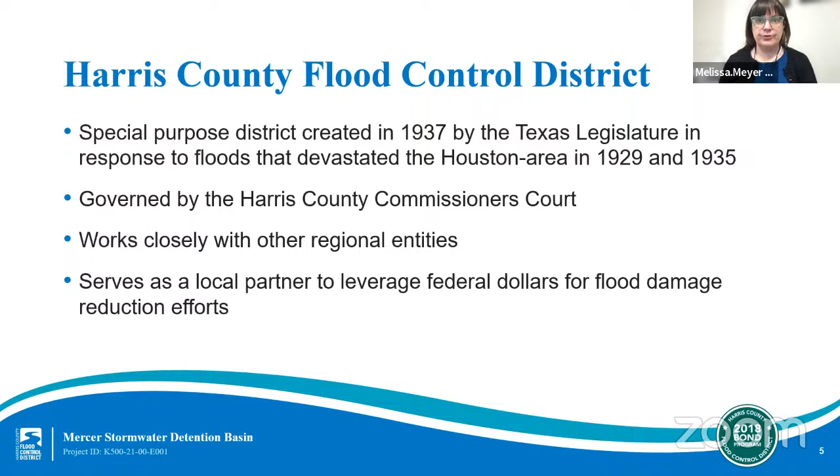The Flood Control District's mission is to provide flood damage reduction projects that work with appropriate regard for community and natural values. Understanding that our systems may mean different things to many people makes it challenging to construct effective projects that also provide the multifunctional use communities seek, as well as construct them with regard to natural values in our highly urbanized and continuously growing region.

Harris County includes 23 main watersheds comprising approximately 1,800 square miles of land and more than 2,500 linear miles of channels, including man-made channels and natural streams, creeks, and bayous. To imagine the totality of this infrastructure, note that 2,500 miles is approximately the distance from New York to California.

The 23 watersheds are all distinct geographical regions of land that serve as a catchment area that drains to a common main channel or drainage outlet. Each watershed has its own unique characteristics and needs based on its level of maturity and geographical location. The program and projects we are presenting on tonight are in the Cypress Creek watershed located in Northwest Harris County.

Now, Harris County and its surrounding area is flood prone for a number of reasons. Namely, it's because we experience extreme rainfall events along the Texas coast, including tropical storms and hurricanes. Our area has a largely flat topography or elevation with slow draining land. And lastly, we have large concentrations of soil types such as clay that do not soak up excess rainfall quickly.

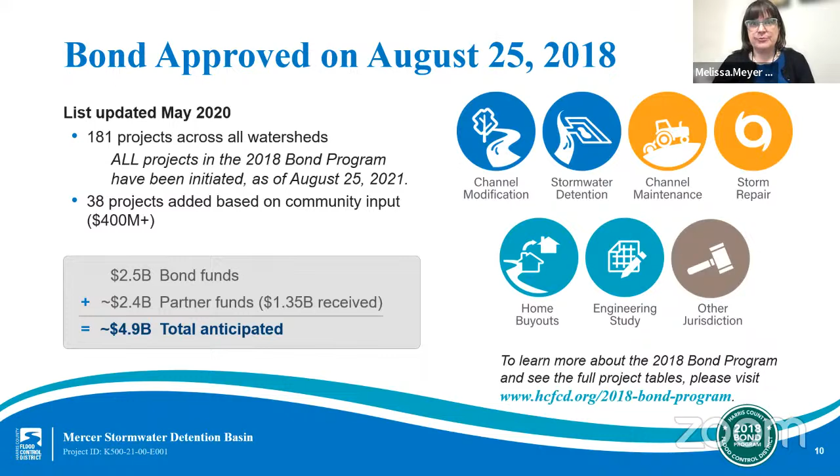The actual schedule of each individual bond project will depend on a variety of factors, including the overall project planning, design, and construction life cycles. Some tasks included in these life cycles, such as environmental permitting, right-of-way acquisition and utility relocation, or in some cases, partner funding requirements of a particular grant, may extend the time it takes to complete the overall schedule of the project. Project lists and estimated schedules are updated regularly on our website.

As bond projects move forward, we're making significant progress towards resilience in Harris County. We shared an update with the Harris County Commissioners Court in January of this year and highlighted a few notable stats. We've completed or closed 27 projects. We've secured $1.43 billion in partnership funding to stretch the bond funds even further for our community. And we've hosted more than 180 community engagement meetings. Your input is critical to our efforts, and we want to ensure our conversations continue. We'll continue these biannual updates moving forward to share progress on the program.

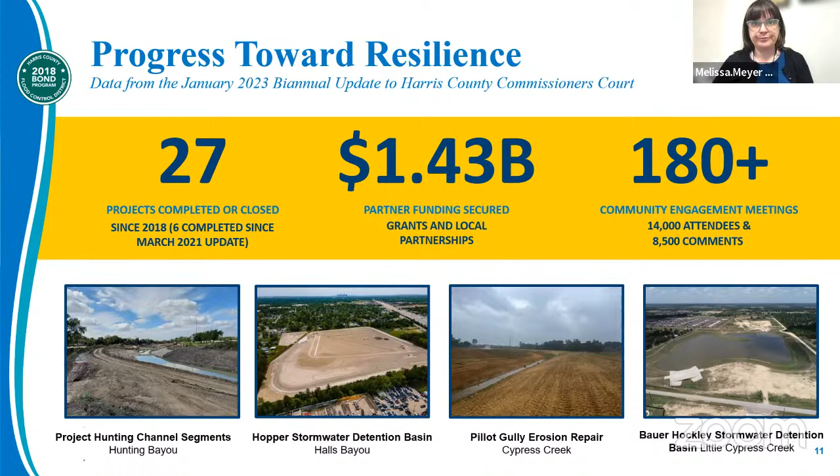While the voter bond was for $2.5 billion, the full cost of every project in our bond list is almost $5 billion. So we made it clear from the outset that we would need funding partners to obtain the full potential of the constructed projects in the bond program. And as I've mentioned, we've had some success so far by securing more than $1.43 billion in partnership funds for projects across Harris County.

And this graphic illustrates that there are many partnership opportunity sources, including federal, state, and local funding that the Flood Control District is working to secure for Harris County. Each agency has its own definition of an eligible project, as well as its own requirements for local match funding. So the Flood Control District works diligently to match each project to the appropriate partnership opportunity.

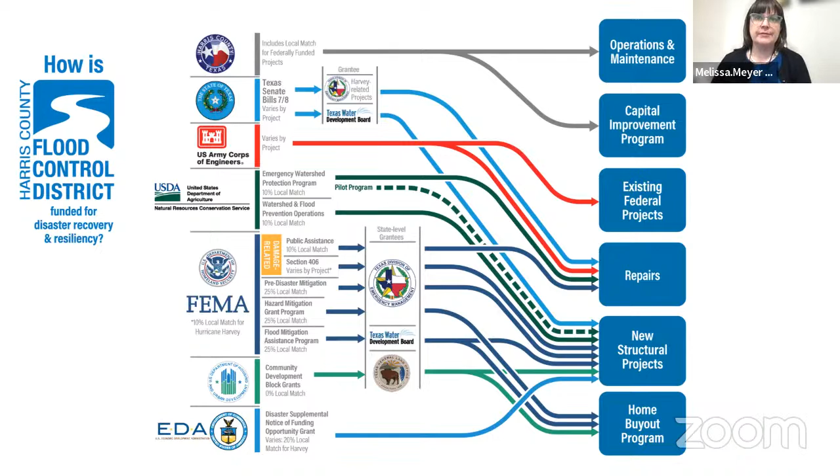We'll now discuss the portion of the program that is specifically about the Mercer Stormwater Detention Basin project. As a reminder, we are looking for your participation as we discuss this portion of the program in more detail. So please feel free to drop any questions or comments you have into the comment box, or to comment via phone by pushing the star key.

The project area is in the downstream portion of Cypress Creek, east of the Hardy Toll Road and north of FM 1960. The Mercer Stormwater Detention Basin is expected to hold 512 acre-feet of stormwater once completed. This project will also be constructed to avoid some jurisdictional wetlands at the site. Disturbing the wetlands that are currently on the property would require extensive environmental permitting.

As we discussed at last year's meeting, this project was awarded a $15.4 million grant from the U.S. Department of Housing and Urban Development's Community Development Block Grant Disaster Recovery 2018 Fund. This CDBG-DR grant has stipulations for when the project must be completed. So this project has been on an expedited timeline, with the preliminary engineering report being transmitted to Harris County Commissioners Court late last summer. And we expect construction to begin later this year. We'll discuss some of the project background before moving into the construction timeline and impacts.

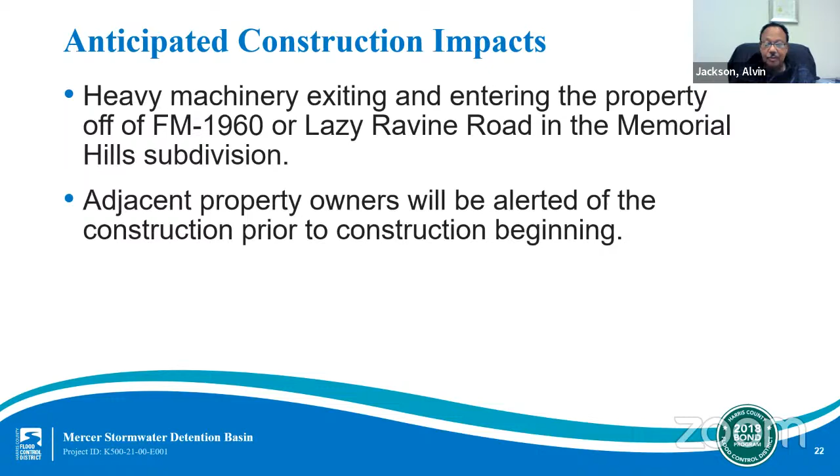Any concerns in the time of construction should be reported to the Flood Control District Service Request Center on our website at www.hcfcd.org. Thank you, Alvin. Okay, Melissa, this next one is for you.

Can you help to explain this concept to those listening tonight? Many residents obviously would want to see stormwater move out of their neighborhood more quickly. Why can't local governments just widen neighborhood ditches and roadside ditches to solve the flooding problem? Sure, that's a good question. The Flood Control District is a no adverse impact organization, and this means that the Flood Control District does not create projects that will negatively impact any of the community downstream.

Thank you, Melissa. Let's stay with you for this next question. What about wildlife in this area and environmental impacts in construction of these basins? The Flood Control District follows federal law on the protection of sensitive environmental areas such as wetlands, and we check for threatened and endangered species, and we avoid clearing during migratory bird nesting season.

Thank you, Melissa. Alvin, flood risk reduction is the goal of our agency, but this is an important topic for residents, including Evelyn, who has joined us tonight. Will there be any recreational amenities planned around this project? The Flood Control District does not typically build trails and other recreational amenities, but we frequently work with partner organizations who want to finance and maintain any recreational elements the community desires. At this time, we do not have any definitive plans to work with a community partner on developing recreation amenities for this site. Thank you, Alvin.

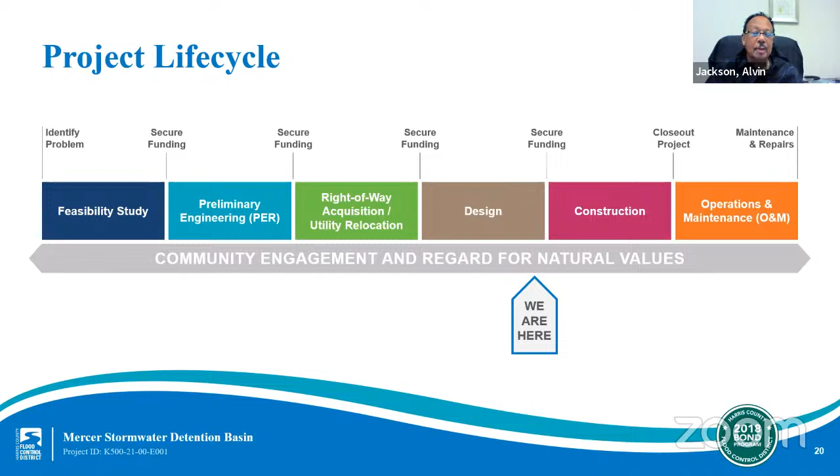Thank you, Alvin. Melissa, the Flood Control District has funding and is actively securing funding to ultimately build flood damage reduction projects. But what happens after these projects are in the ground? Is the Flood Control District responsible for maintenance and upkeep of stormwater detention basins after they are complete? Generally speaking, yes. But to clarify, the Flood Control District is responsible for maintenance such as mowing, debris removal, and vegetation management of its properties. We mow the majority of our channels and basins only 3 times a year.

However, there are instances where a local entity, such as a MUD or an HOA, chooses to enter into an agreement with us, where the Flood Control District pays them for the 3 mowing cycles, and the entity takes on the cost for additional mowing cycles at their discretion. If and when a sponsor chooses to build and maintain a recreational amenity on Flood Control District property, mowing is often a part of that conversation, and similar agreements as noted above can be utilized.

Also, I want to mention that we have a very helpful interactive mowing tool on our website at hcfcd.org that's updated to reflect our current mowing activities. Thank you, Melissa.

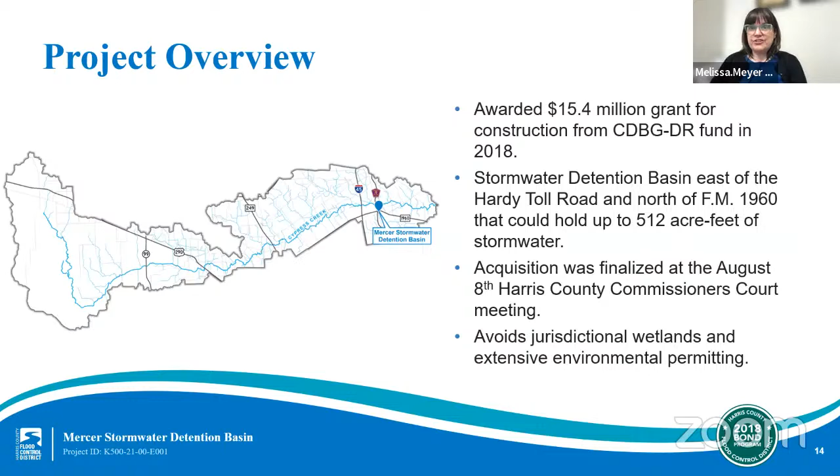And as we discussed at last year's meeting, this project was awarded a $15.4 million grant from the U.S. Department of Housing and Urban Development's Community Development Block Grant Disaster Recovery 2018 Fund. The CDBG-DR grant has stipulations for when the project must be completed, so this project has been on an expedited timeline, with the preliminary engineering report being transmitted to Harris County Commissioners Court late last summer. And we expect construction to begin later this year. We will discuss some of the project background before moving into the construction timeline and impacts.

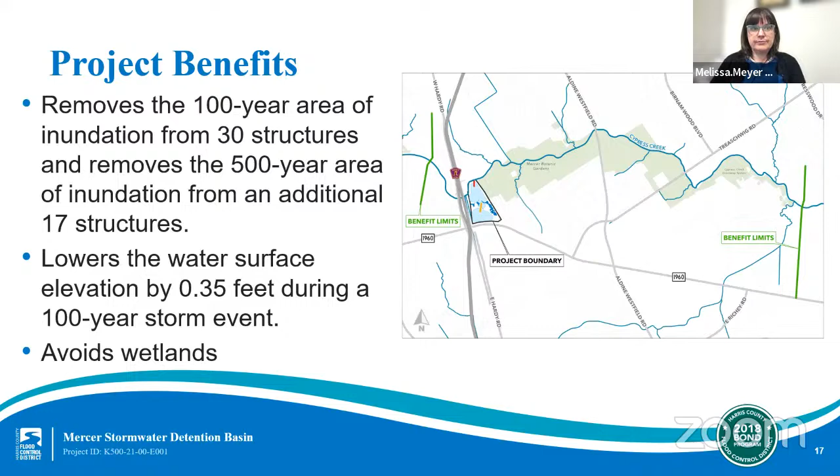Let's talk about some of the funding that this project received and the stipulations that come with that funding. Like we've mentioned, the Mercer Stormwater Detention Basin was awarded a $15.4 million grant from the U.S. HUD Community Development Block Grant Disaster Recovery Program, or CDBG-DR program. The requirements for this funding are that the Flood Control District contribute a local match of $6.8 million from the 2018 bond program. We also used bond funds to acquire the property that this project will be built on, and the property was acquired earlier this summer.

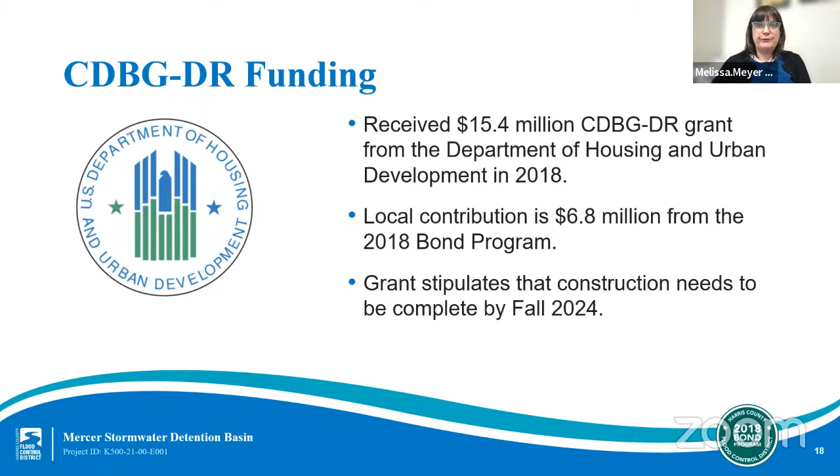The other requirement for this funding is that the construction of the project must be completed and closed out by fall of 2024. And we hope to complete construction next summer.

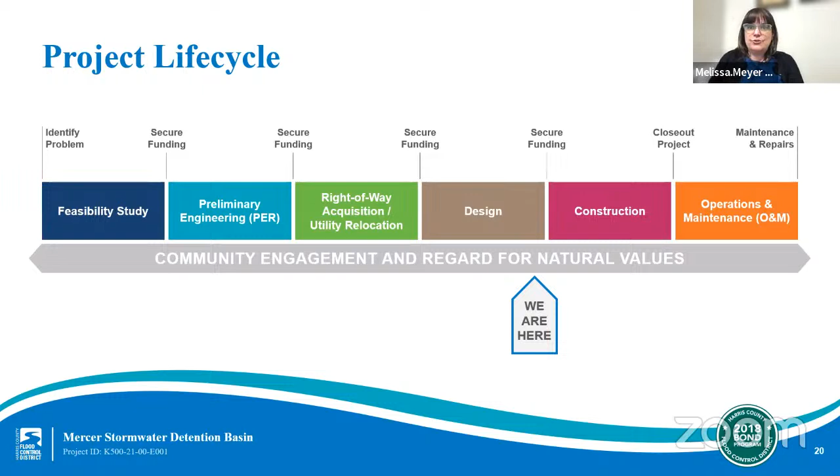Let's talk about the project outlook and the next steps for the project. This graphic here is our typical project lifecycle chart that generally all of our projects go through. As you can see on the slide here, we are currently in the design stage for this project. And during this stage, we'll finalize the design for the recommended project, create construction-ready plans, and obtain any necessary permitting to prepare for the construction stage. This project is expected to move into the construction stage in the next few months.

And now that we've talked about the project lifecycle, let's talk about our project timeline going forward. The final design was completed this summer of 2023. Property acquisition was completed in August of 2023, and we are currently soliciting bids for a construction contractor, and we expect construction to begin in November or December of 2023. Finally, construction will need to be completed in the fall of 2024 to meet the CDBG-DR funding requirements.

As with any construction project, there will be those unavoidable construction inconveniences. We expect heavy machinery and trucks carrying away materials from the site. We expect those trucks to be exiting and entering the property off of FM 1960 or Lazy Ravine Road in the Memorial Hills subdivision. And we expect that there may be some construction noise that will be audible from the adjacent homes in Memorial Hills. The good news for this project, though, is that the project is set back from the surrounding roads, and there is also a tree buffer that will help mask the project site from the road.

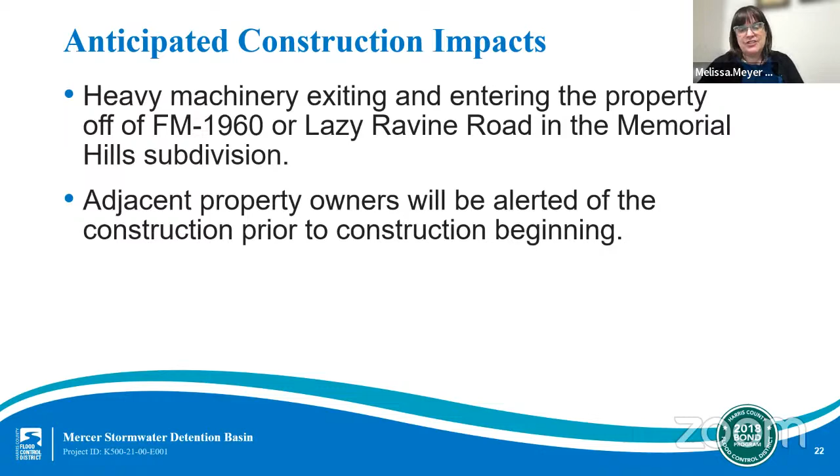Thank you, Melissa. Thank you for that walkthrough. I'm sure our guests really appreciate that.

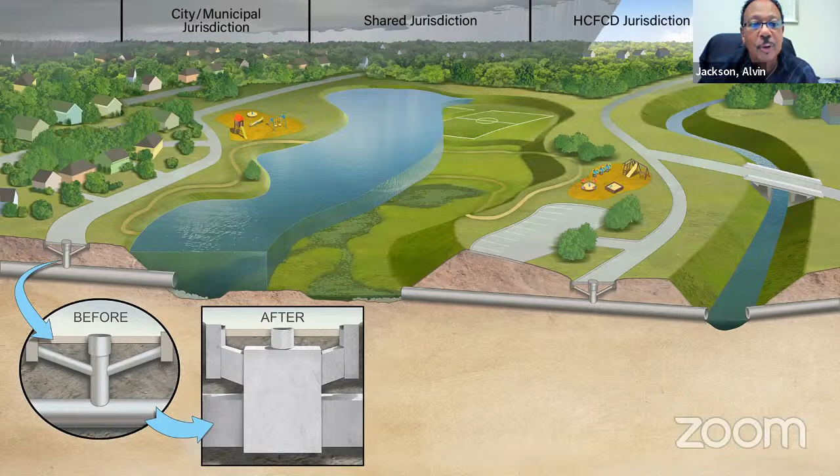Alvin, this next question is for you. Jim is asking for you to please share why a wet bottom detention basin was not selected for these basins. The reason that the wet bottom was not selected is that this particular basin is within the range of the Intercontinental Airport, and we're required to have a dry bottom basin, so we don't create an area for birds to habitat. And so with that being the FAA requirement, we had to file documents indicating that this would be a dry bottom basin and would not cause a bird infestation in an area where Intercontinental is in their flight path.

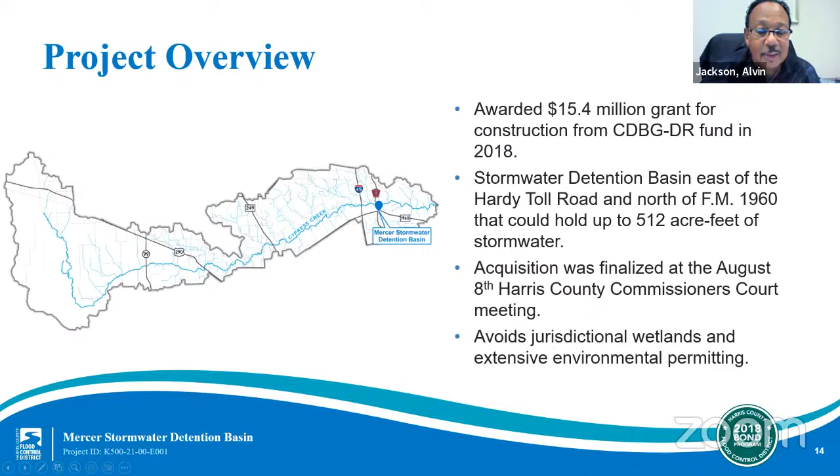Thank you, Alvin. Jude mentioned that the map shows a concept. However, will the area look the same or similar? Also, how close is the southernmost basin to Memorial Hills subdivision? Memorial Hills subdivision is actually east of this, just east of the wetland on that particular map that you had. It's east of our basin; where you see the project boundary is actually their area for their outflow that also flows into Cypress Creek. They have a 30-inch. So they're in the area where you see the light yellow diagram that's identifying the pipe that intersects between the two basins.

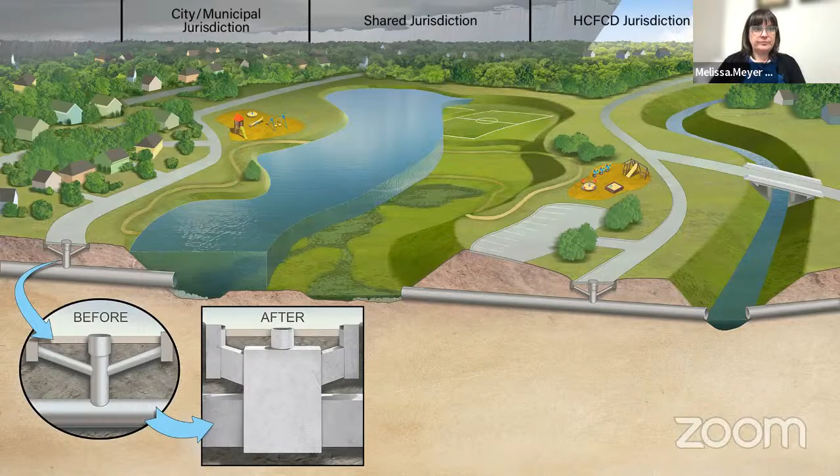Thank you, Melissa. Alvin, do you mind revisiting the idea of recreation? That is something folks are really interested in. Yeah, the Flood Control District does not typically build trails and other recreational elements, but we frequently partner with organizations who want to finance and maintain any recreational elements that the community desires. At this time, we do not have a definitive plan, but what we have done with the design is we provided a 30-foot berm around the basin, should there be any future desire to consider a trail on a particular site of this project. Thank you, Alvin.

Melissa, regulatory floodplain maps are important to Harris County homeowners. Do you feel prepared to talk at a high level about MapNext? Sure. I mentioned earlier that Atlas 14 rainfall somewhat recently came out that basically changed the definition of what a 100-year storm is, just based on recent data and recent storms that we've had in the area. So now that we have this new data, we can actually run it through our maps to update the floodplains to give a more accurate representation of what happens during these rainfall events.

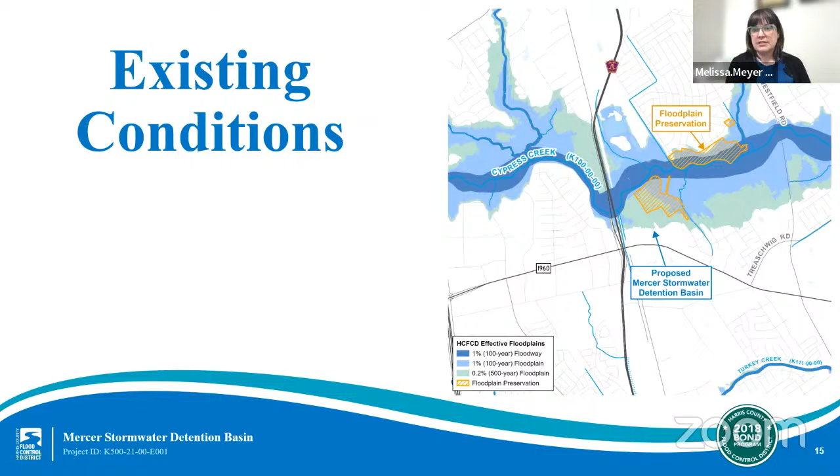We do have information about MapNext on our website that you can look into. The other thing that MapNext will address is we just basically have better technology and better tools since the last time these floodplains were mapped. So they will be even more accurate in that regard as well.

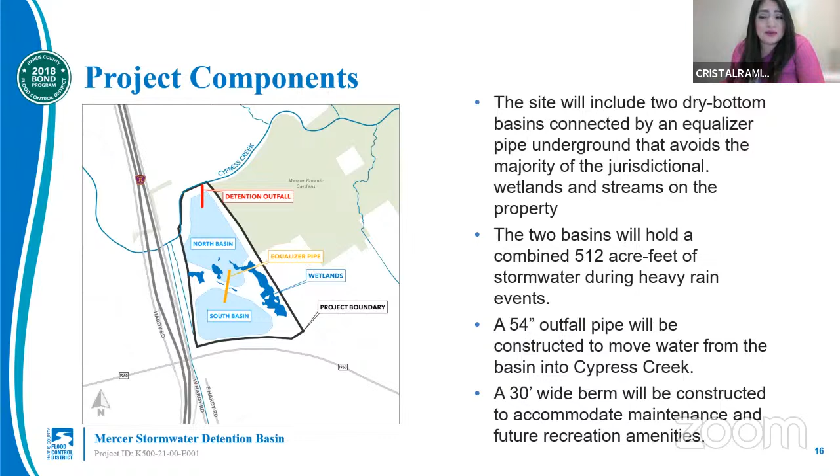Thank you, Melissa. Alvin, as our last question of the evening, Jim is asking, with the basins being adjacent to Mercer Botanic Gardens, can consideration be given to explore if there is something that could be done to make this an asset to Mercer Botanic Gardens? Have there been any discussions with the folks at Mercer Botanic Gardens? In the early beginnings of the concept for this particular basin, there was discussion with the Mercer Botanic Gardens, but since then they have decided to develop their own basin to do their mitigation in the area where the botanical garden is. And it's my understanding that that design is in progress as we speak.

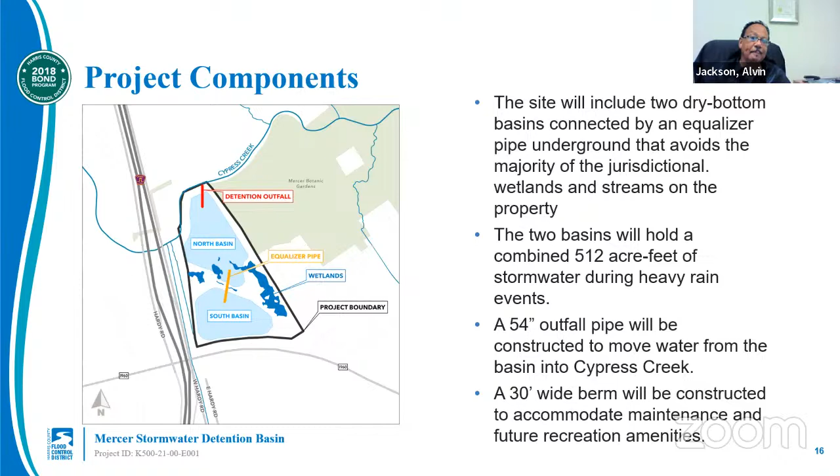Thank you, Alvin. And with that, I would like to share one final reminder that the comment period associated with this meeting runs through October 18th, 2023. But we're always looking for your input and engagement. We also encourage everyone to get flood insurance as flood season in Harris County runs year-round.